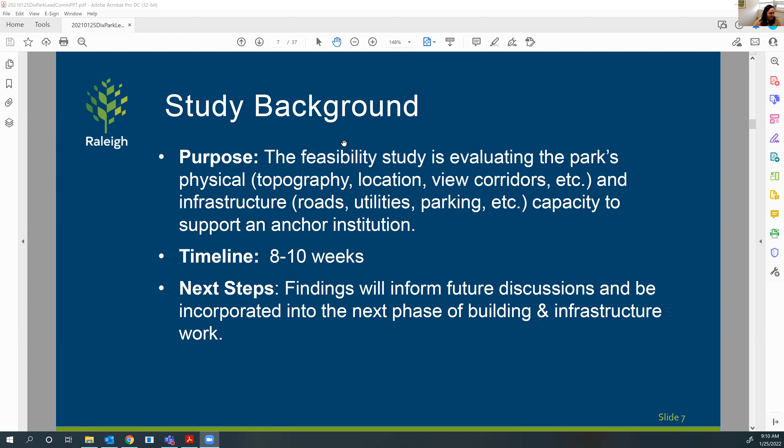So with that context, I'd like to turn it over to MVVA and Hillary, your team, to start the presentation.

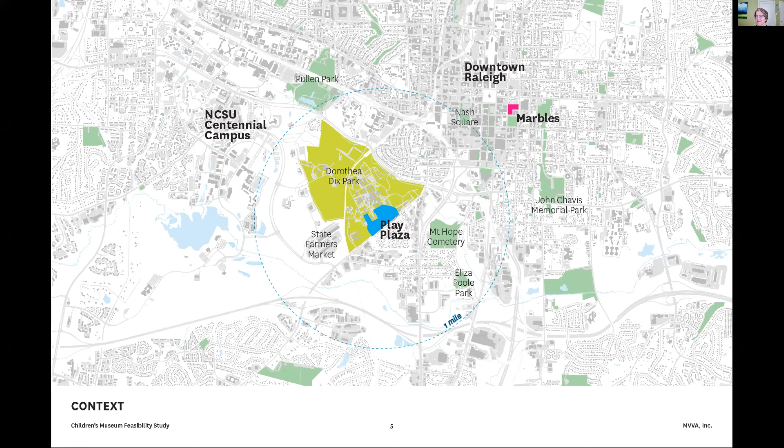Thank you, Sally, that's such an important clarification. So when we look at the master plan, it's always a great foundation and reminder of the guiding principles for all the work and projects to come: building from what is here, opening up, connecting, and offering something for everybody. And of course Play Plaza, which is in full development moving into construction documents,

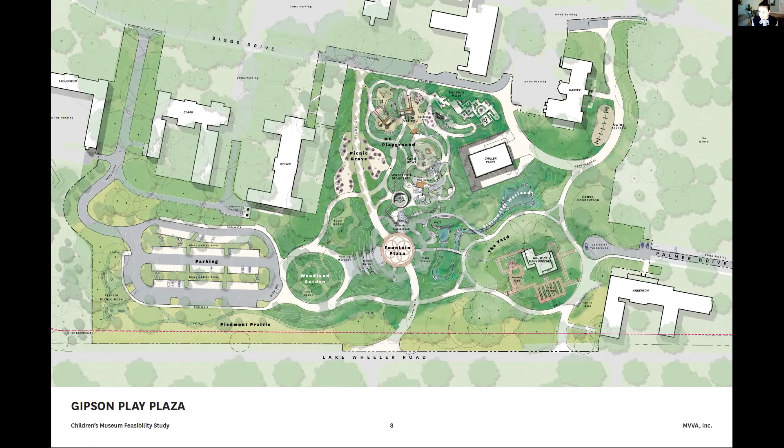is absolutely an ideal site for us to begin thinking about locations where Marbles could potentially relocate. So the big overarching question is: how can a new cultural institution such as Marbles in the park become the most compatible and supportive of both the Dix Park Master Plan and Play Plaza? How can we find synergies and mutual benefits for all?

The answer is really a balance of three things, which is the foundation of our study: balancing Marbles' expansion goals with access and parking impacts and the site planning criteria. So just to dive into those three components in more detail, the expansion goals we learned from Marbles incorporate three main elements.

Their new expansion is intended to be a space for new exhibits, new programs and events, as well as the logistics that keep all of those elements functioning. The goal is for 1 million annual visitors by 2030, a similar goal to Play Plaza. Their expansion, and this is really key, is to include 100,000 square feet of interior space, as well as outdoor areas for expanded learning and development opportunities for children.

The second element of the three is our site evaluation criteria. This was really important to develop, not just for Marbles, but in general when locating an institution at Dix Park. There are a few components to this: location, access, being safe and easy to use for all modes of transportation, positive impacts on park functions, and compatibility with parking demand—we'll touch on that in more detail. Program: expanding Dix Park visitors with new programs through Marbles-sponsored events, among other opportunities, but also supporting the park's financial needs.

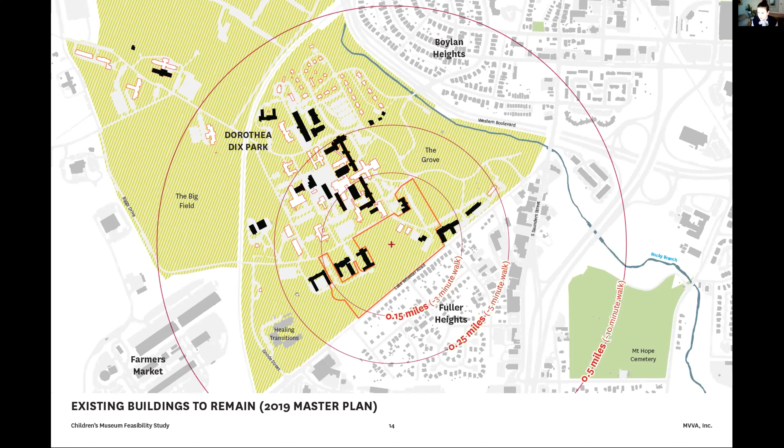So the main thing on this slide is to point out the location and proximity of the campus to Play Plaza. These rings represent minutes of walking - the interior circle is 3 minutes, then 5 minutes, then 10 minutes. We really tried to locate sites for Marbles within the 5-minute walking radius to Play Plaza.

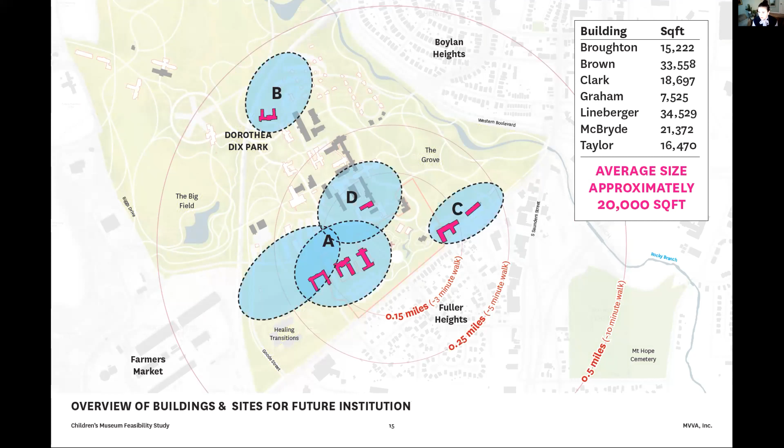We identified 4 potential sites, referred to A through D. The main point, and Matt can elaborate on this if he's on, is that the square footage of existing buildings, highlighted in pink, ranges around 15,000, 30,000, as low as 7,000. The average size of the buildings on the site is 20,000 square feet. So we're working with inherited buildings that are quite small in comparison to the program that we understood Marbles needed for their expansion.

We've been fortunate to work with VHB traffic engineers, and they've helped us understand the access opportunities and constraints with these 4 different sites - the topography and site conditions that may make it more difficult for people traveling by foot or bike to get to the different sites.

What we ultimately see is that Site A, which we'll spend more time on, and Site C are located along Lake Wheeler Road. These sites are predominantly flat, and they're also adjacent to a number of existing and proposed or potential bus stops. So Sites A and C are what we would consider prime for siting an institution like Marbles.

Sites B and D, which are more interior to the park, have longer distances to travel, are further away from bus stop locations, and have a little bit more rugged terrain in terms of getting there.

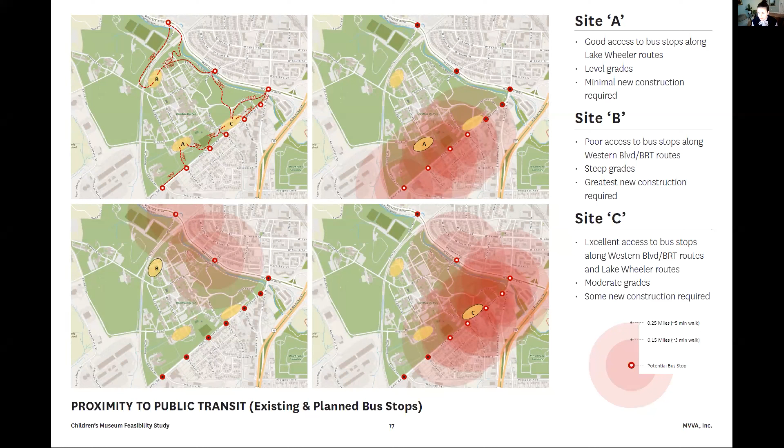We've done studies with VHB and Marbles, and their preliminary parking analysis reveals the need for 300 to 500 spaces dedicated for Marbles. So one of the challenges of the study has been looking for ways to have synergy in terms of parking - we'll talk more about that in the discussion.

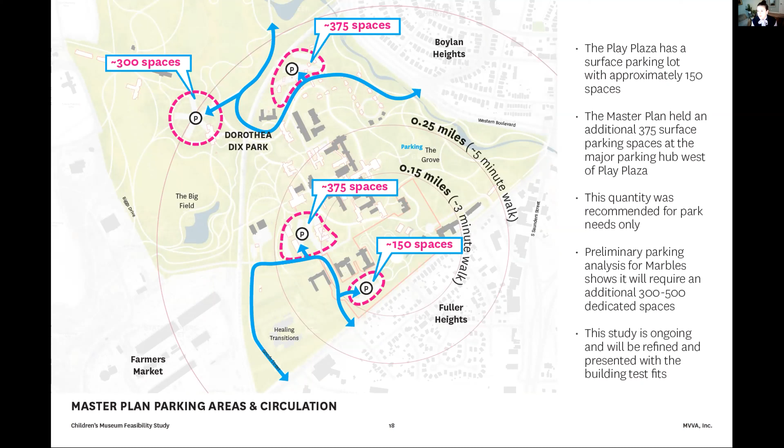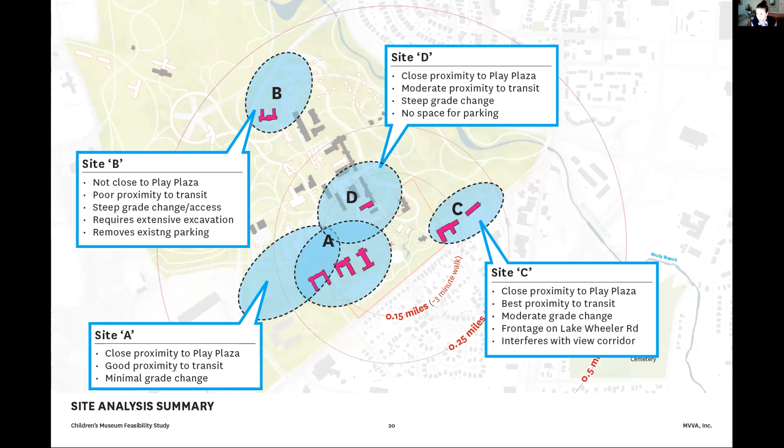So this slide concludes the section that I'm going to speak about. We will come back to this once we've dived into the different massing studies, which we're very excited to share with you. And for that, I'm going to hand it over to Patrick Hobgood of Hobgood Architects. Patrick, take it from here.

Okay, hey everybody, thanks Hillary. Patrick Hobgood from Hobgood Architects. This is David G. We've been working on this for quite a little while to see where an institution of this scale could comfortably fit into the Dix Park master plan.

Depending on what type of program, we're adding a circulation multiplier of 1.4 - sometimes museums get up to 1.6, 1.7. So our studies are looking at a building of 140,000 square feet, but it could very easily be closer to 170,000 gross square feet.

And then the other thing I'd pull out really quick is the admin program, which is about 10,000 square feet, and also maybe classroom education is about 20,000, so maybe that's about 30,000 square feet total. I mention that because some of the schemes we look at are attached to existing buildings, to see how that 30,000 could be reused.

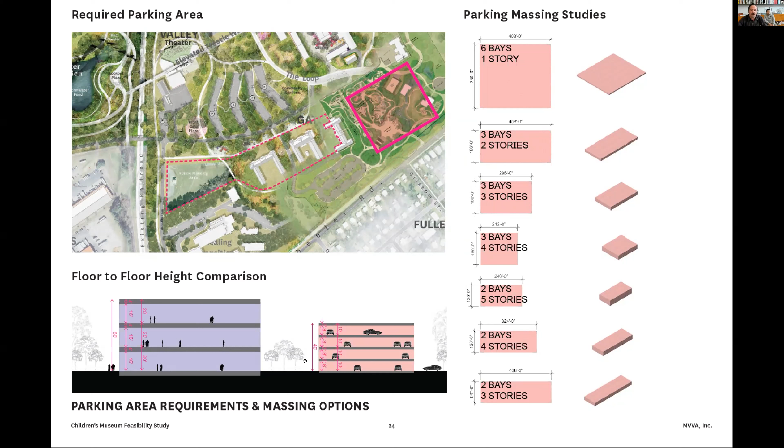For the museum, they asked for 16 feet clear, so we have a 20-foot floor to floor. Most of the time, we try to limit the massing to 2 stories, about 40 feet. There's some 3-story options, so then you're approaching 60 feet vertically. And then the parking, the structured decks are 8 feet clear, 10 feet floor to floor, so about 2 levels of parking per level of museum. You'll see that in pink and purple in the studies.

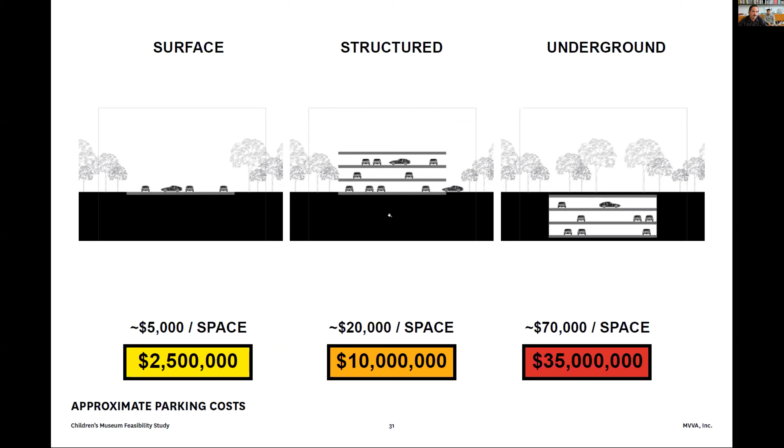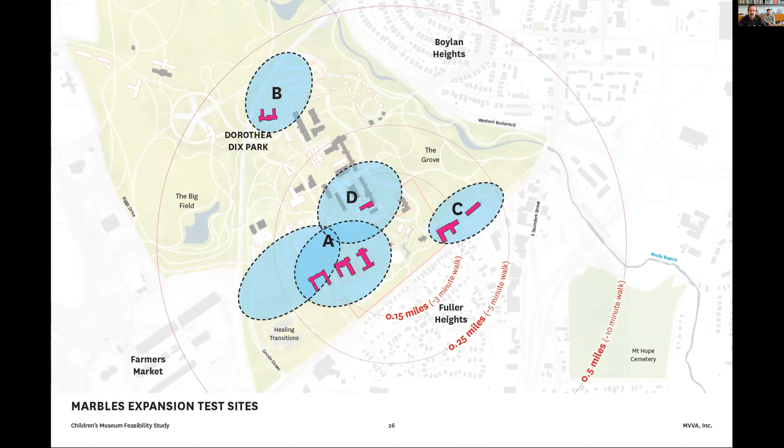Site D is up here on the ridge. You can go to the next one. So here we are kind of in the heart of the master plan. We just have one option up here. We looked at a number, but how to thread in a 140,000 square foot building into this already densely packed top of the site was a little bit challenging. We have the McBryde building.

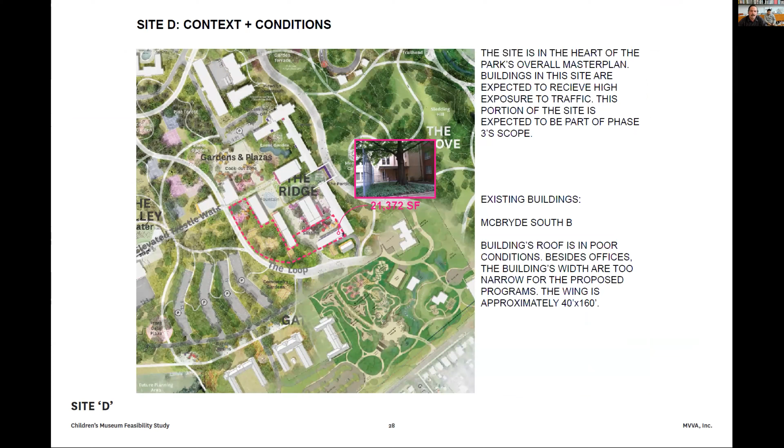McBryde South is potentially one that we could reuse, that's about 20,000 square feet. And when I say reuse, a lot of these existing buildings aren't obviously built for exhibition space. So when we consider the existing buildings, we're looking at admin space, possibly classrooms, some of the education programming that could be inserted into that floor-to-ceiling height. These are the kind of architectural context that we'd be inserting into.

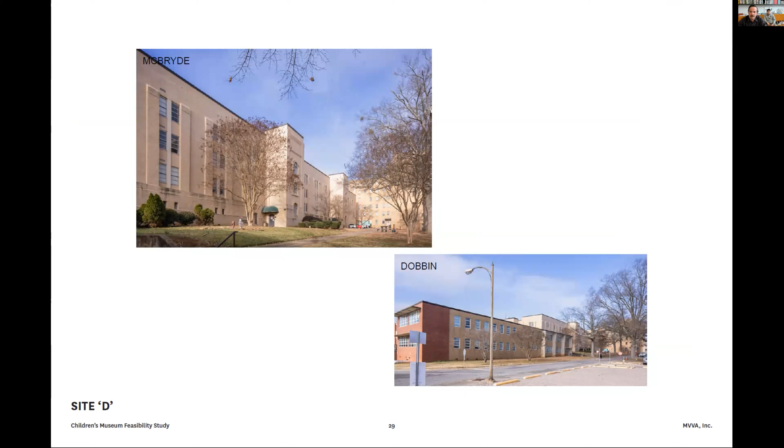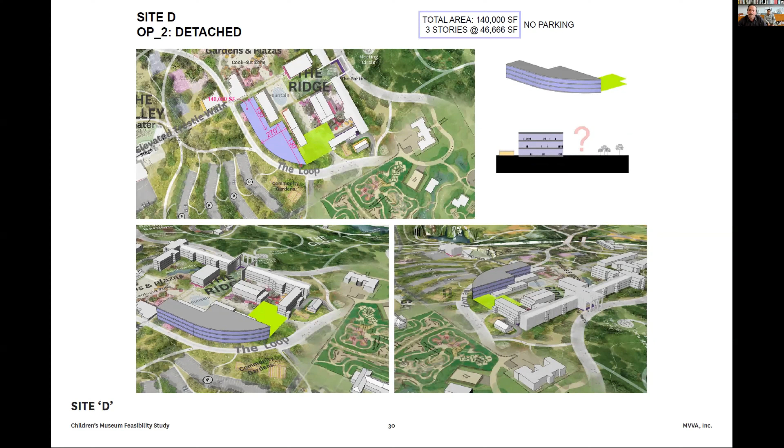What we couldn't accommodate on this site was a new parking strategy, so we talked about ways of increasing parking just to the southwest of this site, but that was the most challenging thing on this site. It's the only one where we couldn't figure out how to do a structured deck. This is a view looking at it to see the mass of that - it's a 60-foot tall building.

Okay, now we go to Site C, which is down here on Lake Wheeler Road. We have the Duke Power easement, which is why this angle is being introduced here.

The easement for their transformers. And then we had two existing buildings on this site that we looked at.

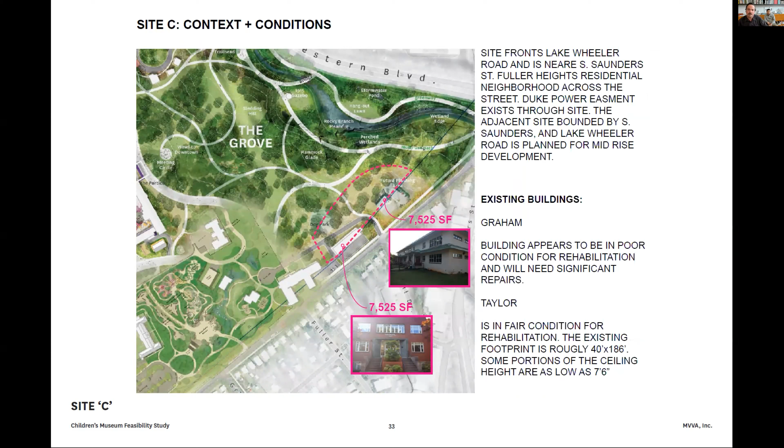One was Graham, which architecturally we didn't really think was very significant and could easily be demoed. And then Taylor, which I think could be kept or could be demoed. We have schemes where we kept it, but what we'll show you is two schemes where we demo both buildings. This is the existing character of those two buildings.

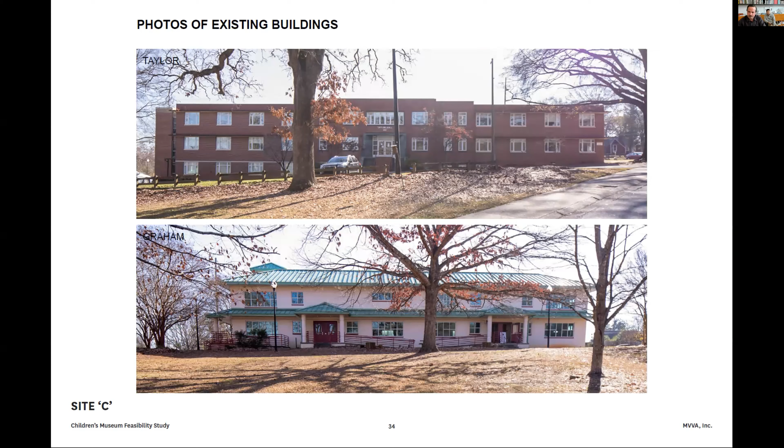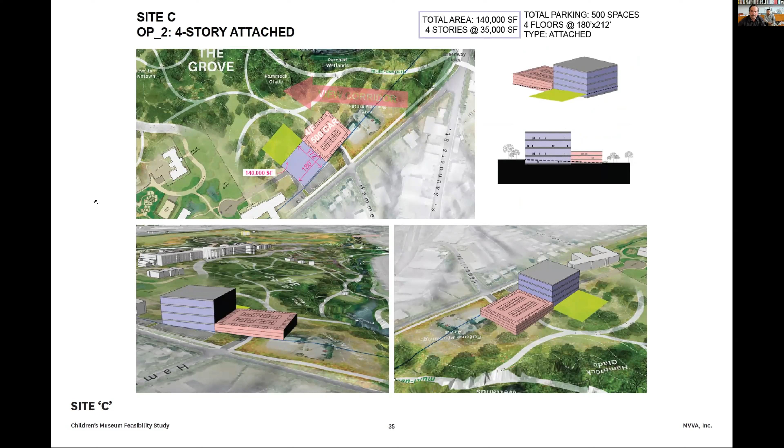And that's up here, so Plaza and Play to the west of that, to the left-hand side of that top left image. And that's kind of great access off Lake Wheeler.

And the same site, we tried to compress this footprint a little bit more. This is, I'd say, a little bit atypical for a museum typology, to stack the galleries on top of the parking. A portion of this building would need to come down and touch the ground, to service escalators and elevators up to the gallery spaces.

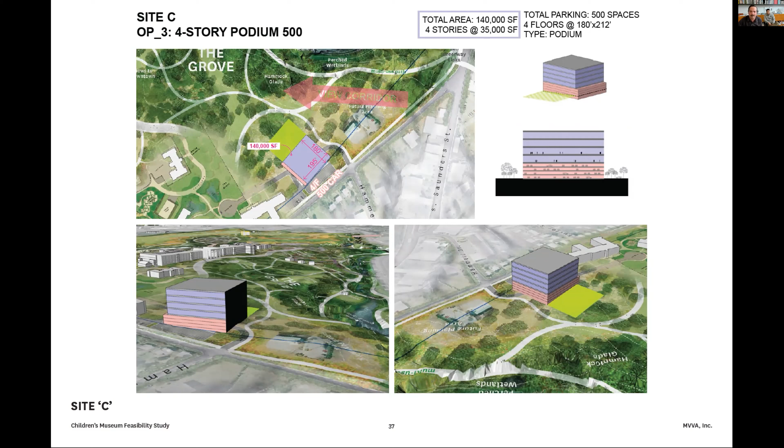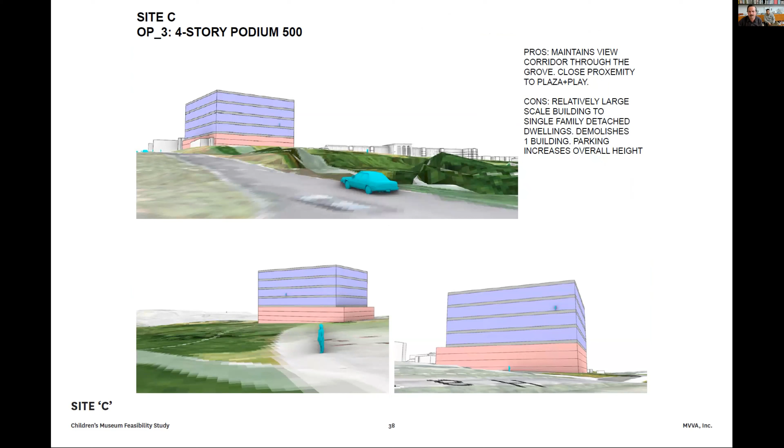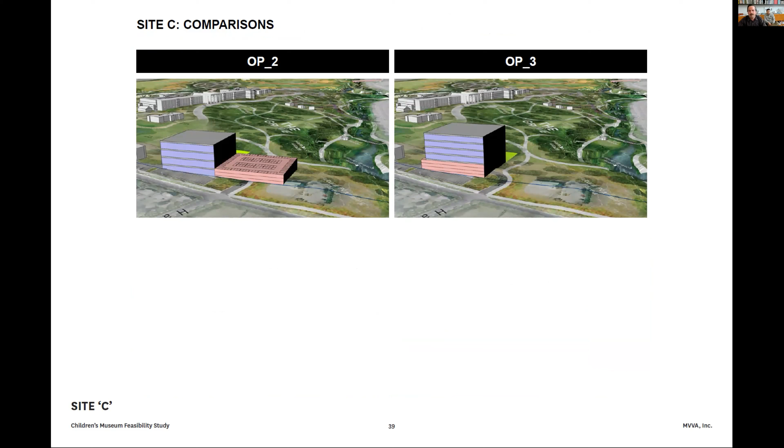This was just an attempt to minimize the footprint and impact on the park. And again, the 25,000 square feet of exterior space kind of attaches into the park. So it gets a bit taller when you stack it, obviously. But we try to keep it to Lake Wheeler. We know that there's some large scale development coming across the street, so we felt like this would be the one site you could go a little bit taller.

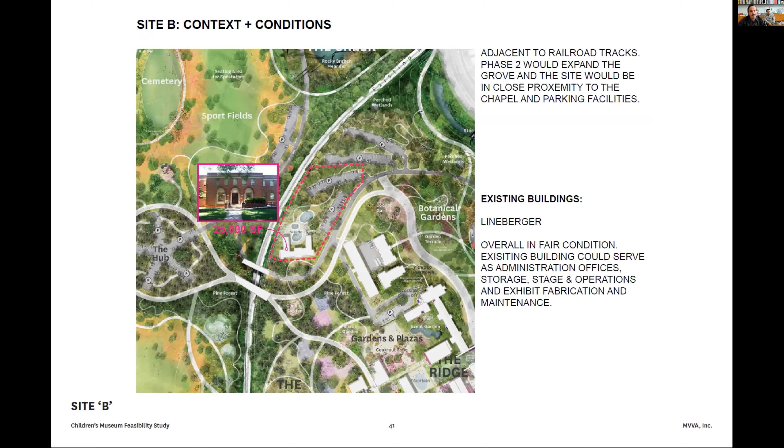Okay, then now we're up at site B. So this is the furthest away from Plaza and Play, but there were some existing buildings that were quite nice. We have Lineberger up here, which is about 25,000 square feet. So we thought this could potentially house - if there's new construction that attaches to this existing building - a lot of the admin and classroom program could possibly be reworked into Lineberger.

So we have a slightly smaller building footprint now. It's 3 stories, we're close to the train tracks, but you can see how the 25,000 square feet of exterior space could connect to the existing courtyard of Lineberger, could wrap around the front. And we have a 5-story parking deck here.

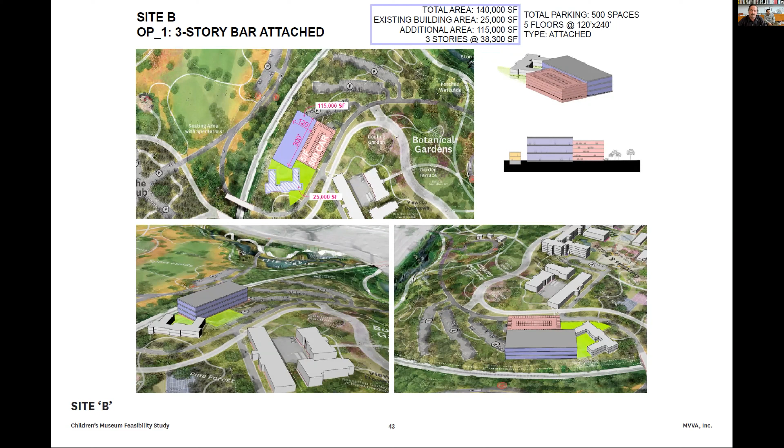I would say this site's probably the most challenging, in terms of - we have this CSX rail line, they have their own stipulations for building adjacent to them. So I know it can be kind of difficult, especially if you go underground at all. And in reality, this massing should be flipped - apologies - the building really should be on the face of this, and the parking on the rail side.

So this is a 3-story structure, a museum structure, and how that could sit and peek up above Lineberger from some views and be tucked in. The biggest exposed views, I'd say, work well in terms of massing on this site.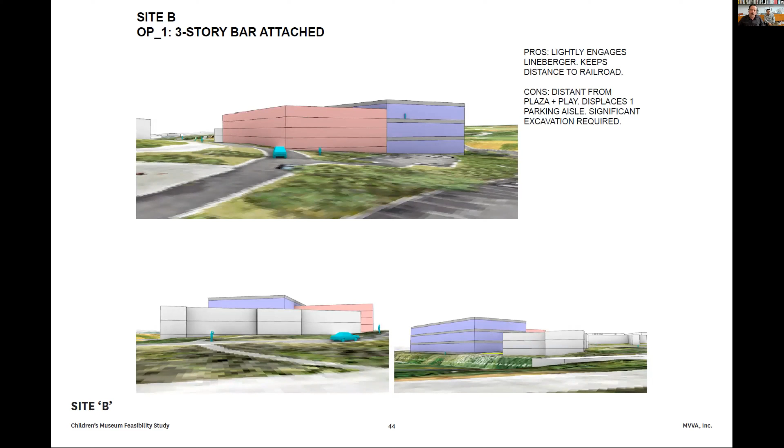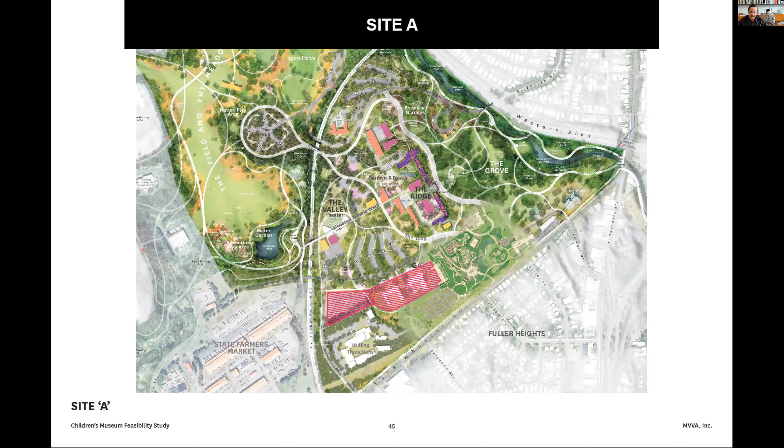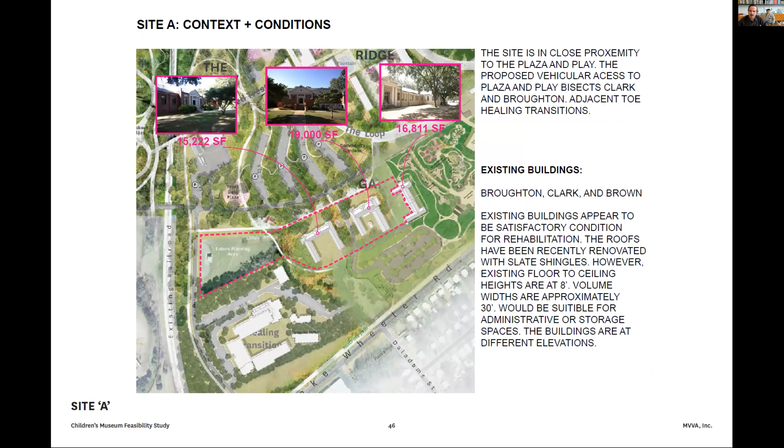Okay, so now we're at site A, which is really kind of a prime site. We have 3 options we can show you guys here - some try to keep existing buildings and some look at new construction. So if we look at what we have here, we have Clark, Broughton, and Brown. Brown is always a great building that we're looking at how that could service the Plaza and Play.

Clark and Broughton certainly could be kept. They're like a story and a half with a large basement that's kind of tucked into the slope of the site.

12-foot ceilings down to 8-foot ceilings in these. A lot of these were kind of dormitories in a previous use.

So if we go to the next one. The first one looks at how the museum could connect to Brown and Clark. We could start to take advantage of some of the existing buildings, making smaller courtyards, and have the museum or this new marbles building fill in between two existing buildings and attach to them. The massing does need to go up to about 2.5 stories, let's say, but this is a first pass.

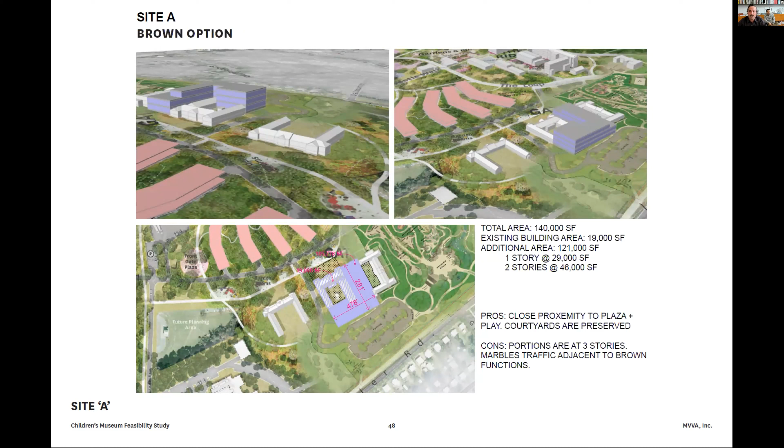So then we just looked at combining Broughton and Clark so that this building could become like a new entry piece. It's a 2-story structure in between, and then trying to reuse the existing courtyards that are there. Some of these funny little cuts on the backside are from the adjacent healing transition site.

And then this one, we just looked at a structured deck of 500 cars, it's a 3-story deck, but because there's a significant slope from the existing buildings down to the west, it drops quite a bit, so we could tuck a portion of that into the ground. It's just a way of hiding a lot of the scale of that structured deck.

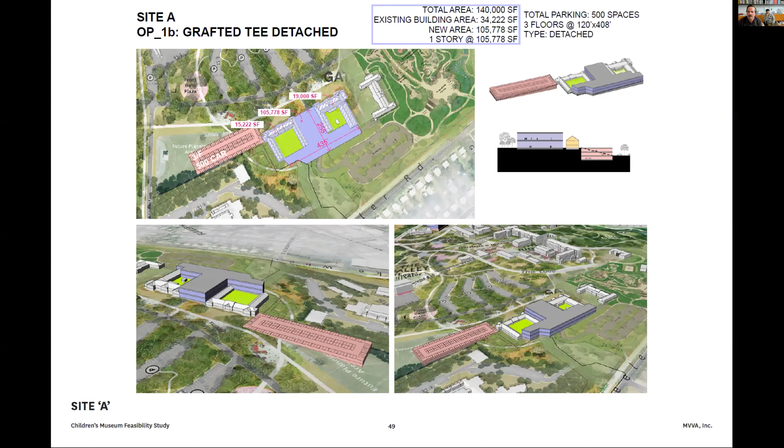If you go to the next slide, this is a similar strategy, but now we're wrapping the museum program around the deck. We think this works really well for the museum parking, it's direct access to all the levels. It cloaks the impact of a large structured deck in the park as much as possible.

And I think we also tuck it into the site. So if you see up by the Brown building, that's 20 feet here, so just one single story. And as the slope drops away, it gets two full stories exposed.

A nice feature here is that you have ample entry courtyard. You have the potential to make an upper level courtyard shared with the Brown building. And then on the lower level of the site, that ground floor or B1 could spill out to another courtyard, so you get courtyards at multiple levels or exterior spaces, and you're a stone's throw from Plaza and Play.

So, hey Patrick, it's Matt. Hi Matt, hey, how are you? Good, hi, thanks everyone, sorry for butting in right now.

I just want to say that this was a solution that, lots of times the good solution seems like, well, why didn't they just think of that at first? And that's usually a good sign. It seems obvious. Don't you think, Patrick?

I mean, this one we came up with last, after we explored every awful option there was. In a way, it had to do with overcoming the phobia of demolishing the old buildings.

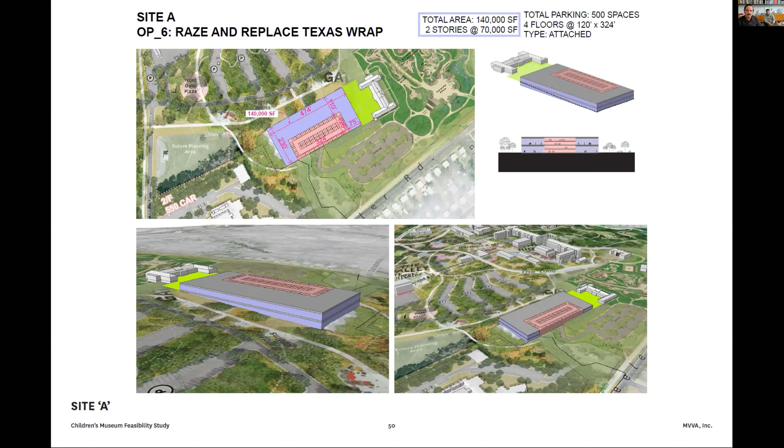I think it's got the views. So Lake Wheeler is the bottom left view looking up. This is also kind of the entry to the Plaza and Play. And then up on the top image, you'll see it with the Brown building, so now the heights are very comparable. It doesn't overwhelm at all.

And like Matt said, this is very crude. With a good architect, you can break the scale down even further by undulating the facade, by staggering elements. So if we looked at 50 options, this for us was the most promising option, the one that was most exciting for the team.

The rest, like Matt said, we also kind of challenge connecting to existing buildings. That construction can be quite costly, and for those buildings, you're going to spend so much money to try to reuse them. If they're not really architecturally significant, we just question that logic. So I think the new construction is probably the most economical, or programmatically efficient, to get the new institution just how Sally would want it.

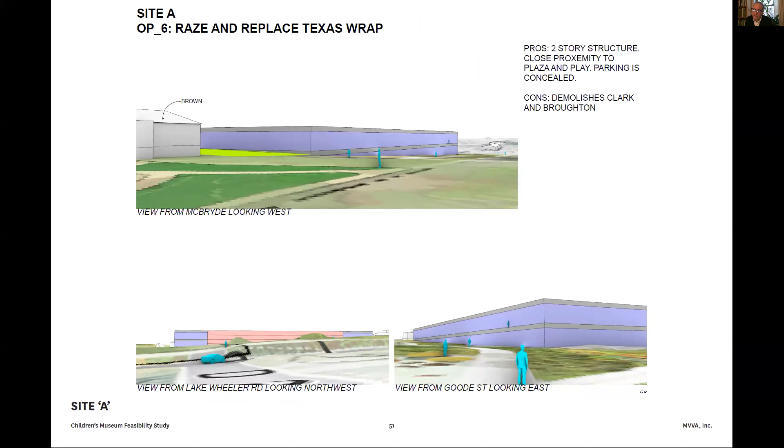The other thing that's not shown here is there's a really huge, significant mass of pine trees also between Healing Transitions and this. And I think the scale of that landscape element is also another thing that brings this into scale nicely here. So that's a recap of those three sites, trying to attach to different pairs of buildings versus demoing Clark and Broughton and just having a new site, new construction here.

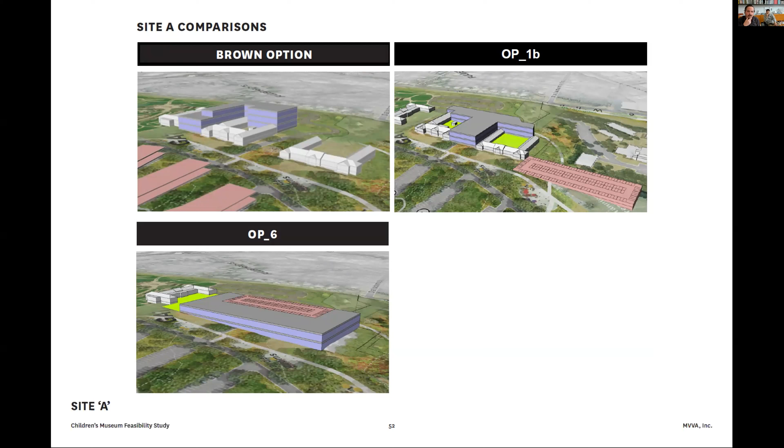And I want to make sure we have time for discussion. So I think this might be one of the summary slides, but Hillary, if we can get to discussion quickly, that would be great. I was just going to hand it over to that. So I will stop screen sharing, but I can pull up slides if anyone needs visuals back.

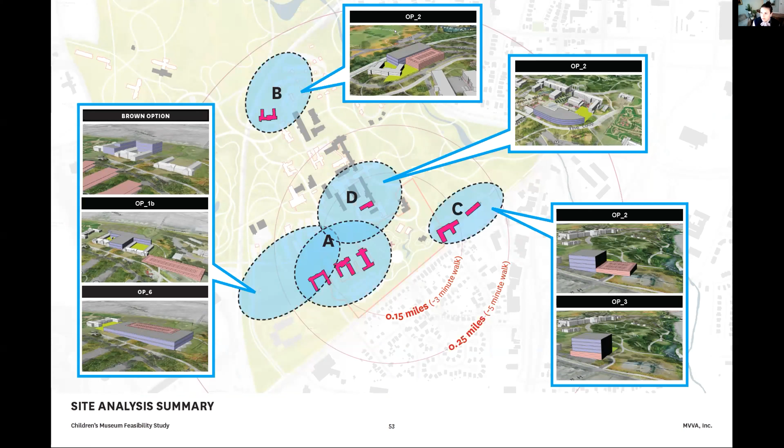Just for context, this is the first time you're seeing a lot of this information. Sally's team and the city's team, along with MVVA and Hopkins, have been working on this for a number of weeks now. So the discussion here really is around your initial reactions to the criteria and some of the things you've seen. We will then come back to you at a future meeting, but wanted to get some of these initial thoughts and ideas out in front of this group for discussion.

If you have a question, if you could just raise your hand and we'll call on you. Jen was first, Jen Wagner. Thank you, Mayor, I had a couple comments.

I think it's really great work and interesting, thanks for the thought that was put into it by the team. One is with the site that was right along Lake Wheeler Road, I would just worry a little bit about traffic backups, just something to consider. I'm sure you've thought through that some, getting into the deck. Another bigger question is, is there a possibility to share parking at all?

You've talked about Marbles needing the additional 300 to 500 spaces, but is all that parking within the park always going to be full? Is that more event parking? So it'd be nice if we could find some sort of shared opportunity.

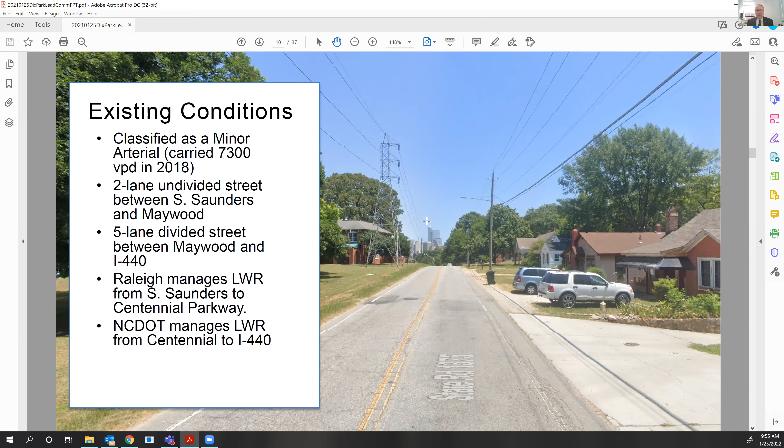So you had a number of questions about how travel patterns work here in Raleigh. Raleigh is a little bit unique. If you think about how most center cities work, we've got a lot of trips that come and go to the job centers in downtown. Charlotte is a great example, folks commute in and out in the evenings. Raleigh is different in that we've got multiple major job centers, so you see a lot of travel along the Beltline and along 70 north and south. We wanted to use that as context setting for this particular slide.

So what you're looking at here are traffic volumes we see. These are 2019 counts, but they're the traffic volumes in these major corridors that feed into downtown but also service Dix Park. Downtown Raleigh is at the upper right corner. The yellow line bisecting the slide is I-40 as it circulates around the bottom, and South Saunders Street is the north-south line running through the middle. To my point about commuter patterns, that 45,000 figure is bidirectional, don't be deceived by the arrows. About 40% of those trips aren't stopping downtown, they're continuing through, giving you this pattern that goes from North Raleigh to South Raleigh and into Garner. That's a little bit different.

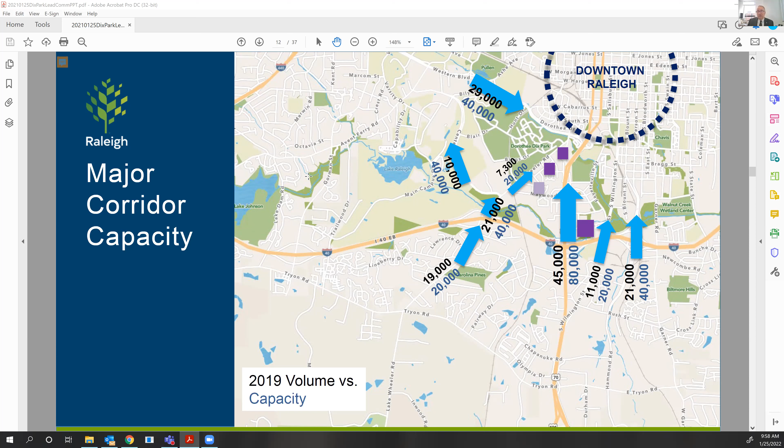Next slide, please. You see this reflected in the street plan. Again, we identified that those capacity needs were in that section of Lake Wheeler Road right around I-40 and Centennial, but again, can be a more compact section and a more compatible section to the park north of Maywood.

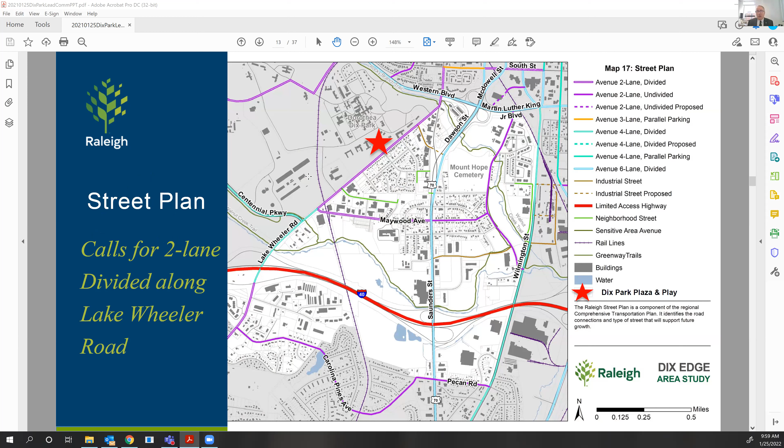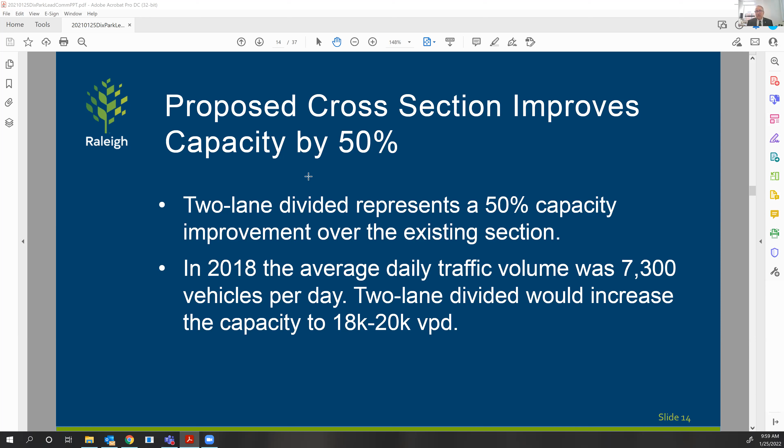Next slide, please. And again, we've shared this slide with you once before, just to talk about how that cross section of a 2-lane divided, by virtue of the fact that we're taking cars out of the turning movements, helps that capacity increase. So again, we would get a capacity of upwards of 18 to 20,000 vehicles per day. So next slide, please.

So it's always helpful, I'm a visual learner, and it's always helpful for me to see examples. So if we want to see what a 4-lane divided would look like, we can look right outside our front door from Plaza and Play and look at that section of Lake Wheeler Road, but also at Centennial Parkway. So you can see they're quite wide sections. They've got varying widths on medians, and they make it a little bit more difficult for pedestrians and for the connections across the street that we are trying to engender here around this portion of Lake Wheeler Road.

On the left side of the slide, you can see 2 projects that we've completed recently. Sandy Forks Road, which is again a 2-lane divided section. That median has got green infrastructure, so it's handling the stormwater needs for the road, and that varies in width along the length of the project.

To the top of that, you see Hillsborough Street. Again, it went from a 4-lane section to this 2-lane divided section, a narrower median, but still is able to handle the traffic and find that balance that we're looking for between a really human environment and being able to actually handle cars. And just for everyone's reference, this isn't in the slides previously, but Hillsborough Street carries about 17,500 cars a day. So it's doing its job of moving vehicles along, but it's also creating a better environment and a better balance for pedestrians and cyclists.

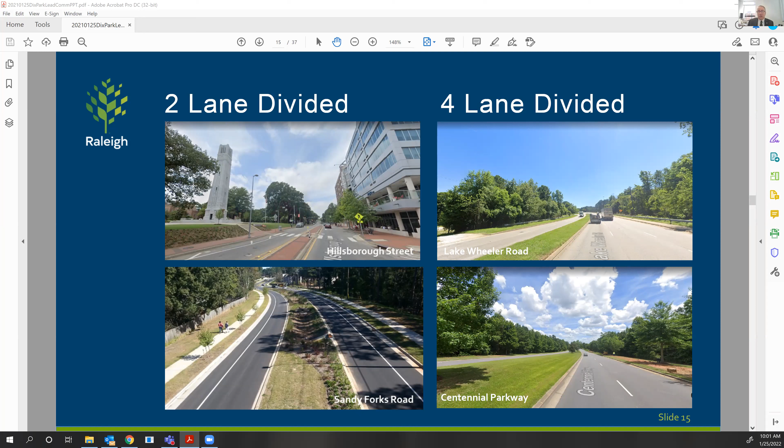So next, we're going to talk a little bit about the Dix Edge study. I'm going to turn that over to my colleagues in planning and development, and Pat Young and Matt Clem will take it from here.

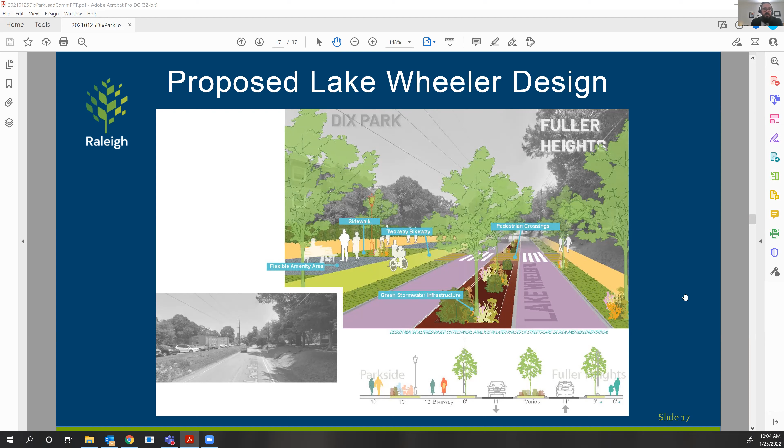Both have been recently approved zoning cases, which will permit mixed-use developments and buildings of up to 20 stories tall. Park City South, number 1 on the list, has also received administrative approval for an initial phase of work, which will include an 11-story mixed-use development.

Item 3 is a pending rezoning of about an acre or so within the Fuller Heights neighborhood. The request will allow 3-story developments. Item 4 is a pending rezoning for the Baker Roofing site, which will permit buildings of up to 20 stories tall if approved. These 2 pending rezoning requests still have several months of public process, and of course will appear before the Planning Commission and City Council before any decision is made on changing the zoning laws.

Items 5 and 6 are south of 40. Those are 2 cases that approved small scale mixed use developments. And of course, item 7 includes all of the property of the downtown south rezoning. Initial subdivision plans have been filed for the area north and east of the South Saunders and I-440 interchange. So there's more information on these developments later.

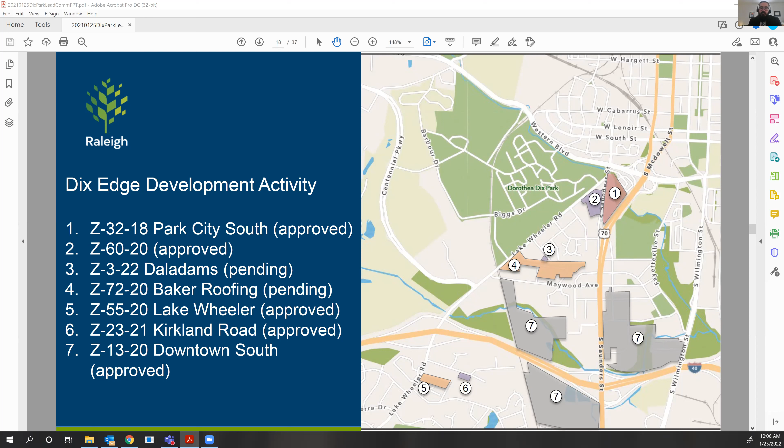I'll hand it over back to Michael here in a second to cover the traffic impact analysis of these projects.

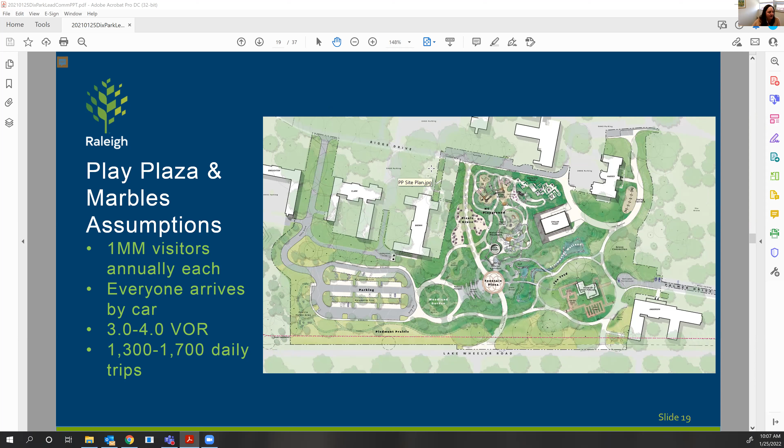And I'll just jump in. So we're not only looking at the traffic generated by the private development, we're also looking at the traffic generated by both the Play Plaza and also including Marbles in that discussion. With both entities estimated at 1 million visitors each, we've done a variety of studies with VHB to understand what daily trips would look like and what the traffic demand would then be on Lake Wheeler Road. So we're bringing all of that together. And Michael, I'll hand it back to you.

Thank you, Kate. Yeah, we're looking to the future. That's the $64,000 question, right? How do we handle all of this projected growth? So these numbers are reflecting some things that are projections and some things that we know that have come out of the traffic impact studies that we've got.

For example, the first two projects, the Park City South and the Hammell projects, the 800 and 900 numbers come directly from their traffic impact analysis, and that's the trip distribution that's been allocated to Lake Wheeler Road. Some of the other numbers, the Baker Roofing, we had to take a number there—if we look at what their full build out would be, that 3,000 represents the number of trips generated at full build out.

But if we take all of these and add them all together, you see that with a capacity of roughly 20,000 vehicles a day on our current trip count, we really only get to about 15,000 projected trips.

That's in a way a little misleading, in that we look at this as being very additive. But as we've talked a little bit about, as we spoke about parking before, when we talk about an amphitheater use happening mostly in the evening and those uses for Marbles, we know there's some difference in time that these things happen. So Kate, next slide, please.

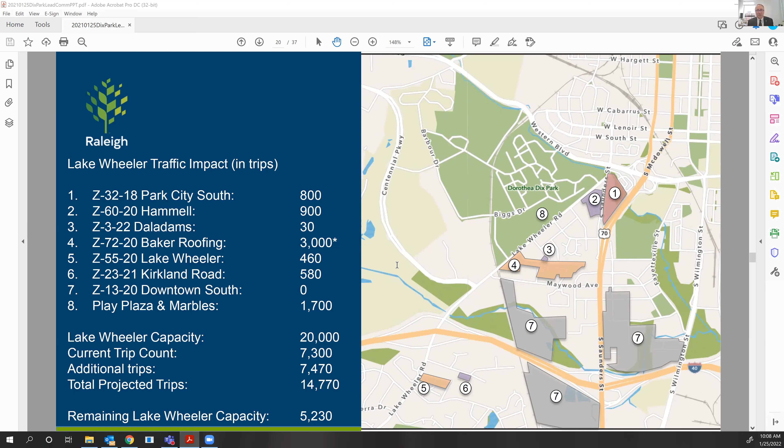So that demand, we know, varies. The peak demand for parks and the peak demand for traditional business hours and commuting hours are going to be different. So there's going to be some capacity gains available, and we feel the street will function as we see fit going forward.

Let's remind folks that the capacity numbers we put down look at the maximum daily demand. And as I mentioned before, we've yet to see traffic recover from COVID like we thought it would, so there's still a little bit more freeboard in that as well.

What we've been trying to do is balance the street design for that human environment you want adjacent to the park, with the access and connectivity needed to get people to the park, to new developments, to downtown, and to 40. So balance is the word we always strive for here.

I think it's important that this cross section, as we see how it works at Hillsborough Street, does achieve that. I want to take an aside here for just a second.

I know that you, as the leadership committee, have all heard from one of our really impassioned citizens about alternatives that would be even more human-centric and park-centric. We looked at a lot of that information that was shared.

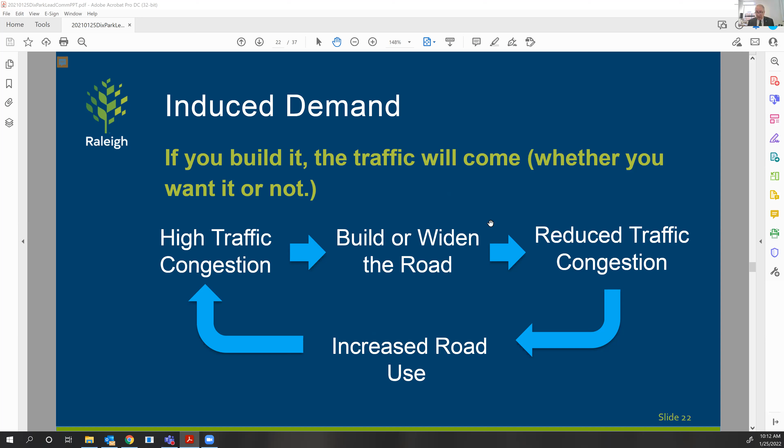Less successful for the park than we're trying to create, because we're trying to create this balance between a human-centric design and actually managing the traffic flows and access needs we have. So Kenneth Ritchie from Engineering Services Group is with us today, and he's going to walk us through the design and schedule for the work going forward.

Thank you, Michael. Good morning, Mayor and members of the committee. I'm Kenneth Ritchie, Roadway Design and Construction Manager with the Engineering Services Department, here to talk through the design and delivery process for the Lake Wheeler Road project.

As has been discussed throughout this presentation, the policy guidance from the street plan and the Dix Edge study have really helped scope the guidance we've provided to our design consultant, STV Engineers, regarding the design we look to achieve through the delivery process.

With that, it looks at a two-lane divided street section with separated bikeway and pedestrian facilities on the park side, and more residential-scale sidewalk facilities on the Fuller Heights side.

In addition, there have been some intersection treatment studies done along Lake Wheeler to identify what some of those intersection treatments should be, most notably potential roundabouts at Hammell Drive and Daladams Street, which our design consultant will be looking at as they move forward with their design efforts currently under contract. Kate, next slide.

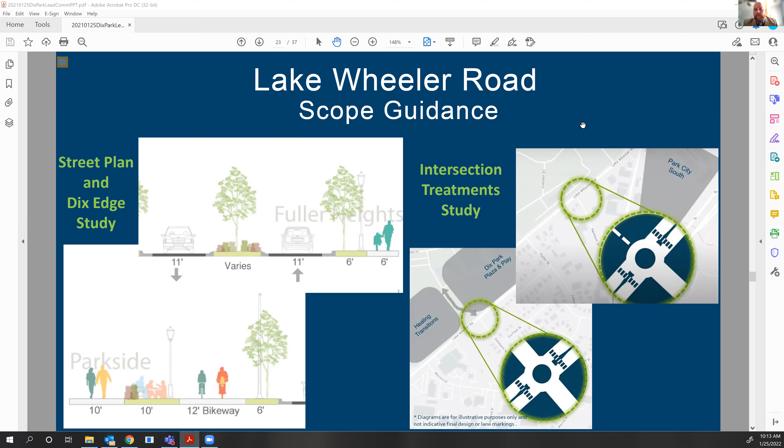Also with this design, there are some design considerations we have to factor in. This is a very narrow corridor when we take into consideration not only the residential Fuller Heights side of Lake Wheeler Road, but also the existing Duke Energy transmission infrastructure and easement along the park frontage on the west side.

We are going to be working with Duke to try and identify ways to complete the design, but trying to maintain minimal impact on the Fuller Heights side, while still balancing minimizing the impact on the park side to the fullest extent possible.

As has also been identified, we will be working with some of the identified development projects in terms of how our design factors into theirs, really pushing forth pedestrian and bicycle connectivity, not only along the corridor, but across the corridor from the residential side. And then, as we discussed previously, the integration of roundabouts to help move and control traffic through this corridor.

Next slide, Kate. Thank you.

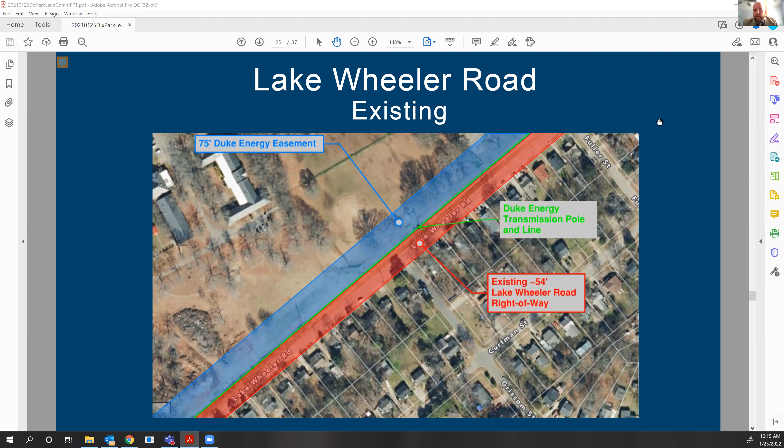So this is just some aerials that identify the existing Lake Wheeler Road. The red identifies the existing right-of-way for Lake Wheeler, which today is approximately 54 feet. It also identifies in blue the 75-foot Duke Energy easement that exists today, which we have to factor in for Duke's access and maintenance of their facilities. The green identifies the current location of the transmission infrastructure as it runs along Lake Wheeler Road.

We do hold the existing eastern right-of-way edge along Fuller Heights, and the right-of-way does come into the park with a relocation of the Duke Energy easement. With that too comes a potential relocation of the Duke Energy infrastructure, which we are working with the team at Duke Energy to identify exactly what those requirements will be.

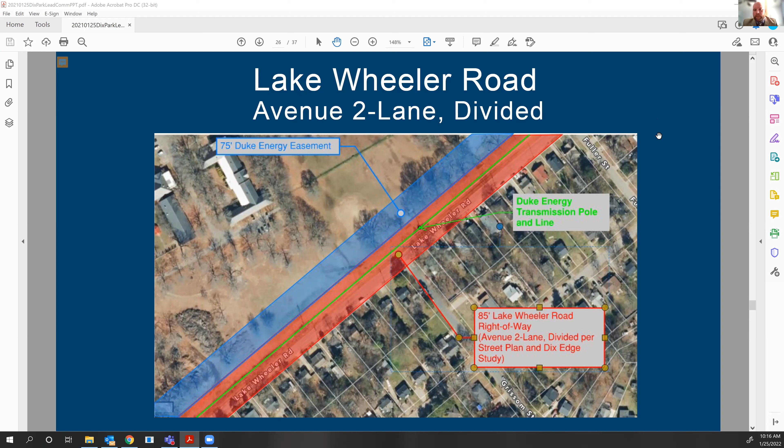It's also important to identify that this only identifies some of the permanent property rights. There will be temporary property rights needed on both sides to facilitate construction, but those are temporary and would cease at the completion of the project.

Okay, next slide. I know there have been some conversations and questions regarding a 4-lane section for Lake Wheeler Road. Certainly, as has been highlighted, that is not a recommended section. The volume projections would lend to a potential overbuild of the corridor, and there are significant impacts to the residential character and residential properties along this corridor.

With the 109 feet of right-of-way, approximately 24 feet wider than the 2-lane section, we would have to look at symmetrically placing that right-of-way along the existing right-of-way, which, as you can see from the aerials and the overlay, has a significant impact on the residential housing along the eastern side of Lake Wheeler Road. And then too, the project cost of the additional pavement and wider right-of-way, the acquisition cost would certainly be well beyond what has been anticipated for this project.

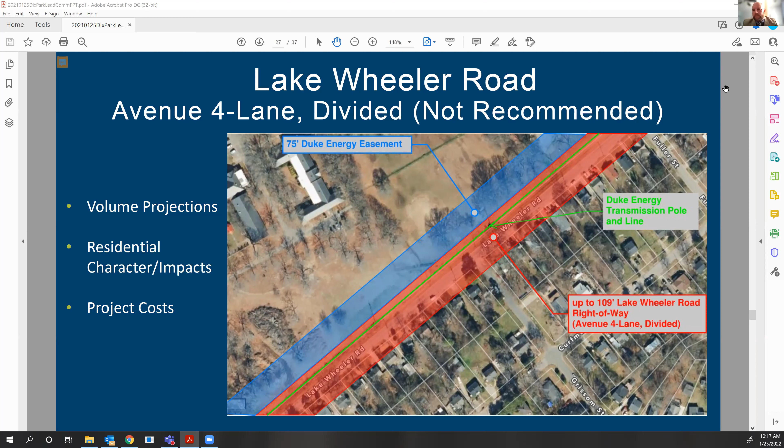Okay, next slide. Another question that has been raised is with regards to the delivery method and design build in particular. So what is design build?

It's a method of project delivery where one entity, the design build team, works under a single contract with the owner to provide design and construction services. Certainly there are instances where this is a very beneficial method of project delivery, but for this particular instance, this process was not a viable option for this project.

One, because full project funding is not yet in place. City Council did reappropriate funding in the summer of 2021, about 1.5 million to facilitate the design. But to this point, the full funding for the project is not available, and thus would not be available for this type of contract.

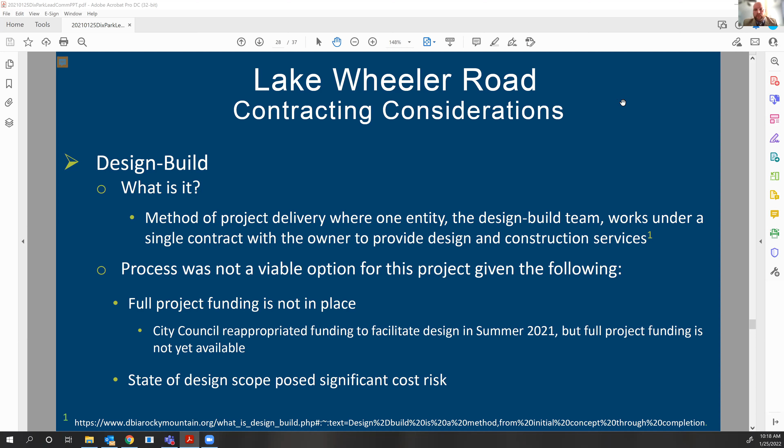And two, given the state of the Dix Edge study and some of the other studies that were ongoing, trying to move into a design build relationship at the time we would have had to do it posed significant cost risk because of some of the variability and flexibility of what the design may ultimately be. Okay, next slide.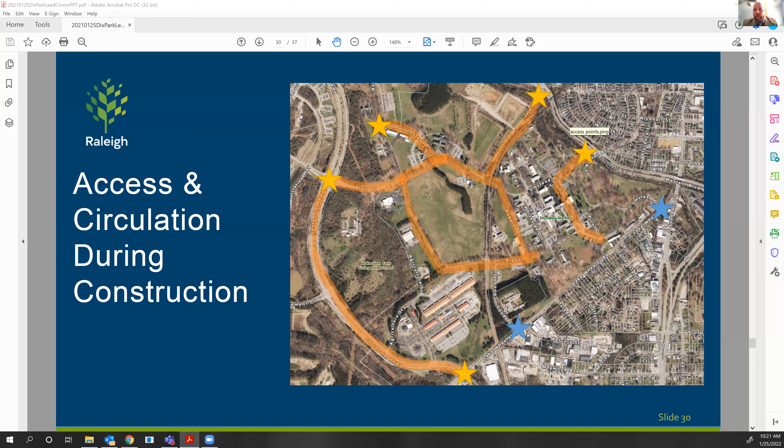And that is all that we have. We'll certainly open to any questions. Well, we warned you that today's meeting was going to be very intense, so lots of information to absorb. I wanted to ask if anybody has any questions of staff on Lake Wheeler Road.

Nancy? Nancy, you're muted. Yeah, you're on mute. Thanks for all the work you've done.

I certainly appreciate it. The only thing I would say is that you talk a lot in the road design about frontage to the residential and single family homes. And if you look at those properties, basically last time I looked, have been bought up in chunks. So I'm assuming they're all going to come for rezoning. And we'll be looking at least 1 million square feet of property there. I think the chance of those single family homes staying little single family homes is very slight. So have you looked at a road design that looks at that projection? Because it certainly seems to be the way we're going with all these large rezonings.